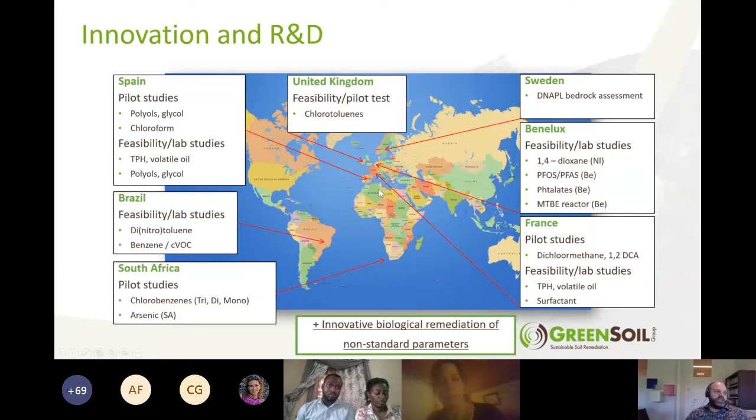Often it starts with questions from clients on either known contaminants of concern, like chlorinated solvents or BTEX, which are quite well known these days, what is possible or not, to very new components. And you can see some of these projects we've been doing throughout the world on different components. And often by the beginning, we also don't know what the outcome is, if it's biodegradable or not, to which extent. But it can be done by a small feasibility study or a larger scale pilot test. And if then it comes out that biodegradation is feasible, we turn it into prospects of a full-scale remediation. And you will see in this slide, a lot of the projects indeed come back as full-scale remediation projects.

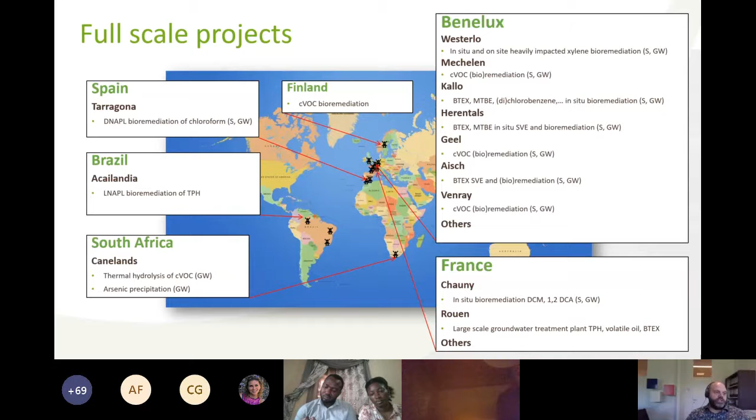And often for us, we try to find solutions where sites have been a long time struggling on finding a solution that could work, that can be implemented, often in very strict chemical conditions. And actually, bioremediation is one of the softest techniques in situ that can be implemented in difficult conditions. So you see that some of these sites then one-on-one come back in a full-scale remediation, which of course is our aim, to provide full-scale remediation options. But that's a bit about GreenSoil in short. Some of you are clients who joined, some don't know us. So I hope that this puts GreenSoil a little bit into a good perspective. But why biology?

Most people know biological treatments from wastewater systems already for decades, and actually that has been implemented already a long time. If you look at a conventional wastewater treatment plant, the first step is most of the time a biological step to remove the bulk of the contamination. Before biology was applied in wastewater treatment systems, that was not the case.

The reason why that has been implemented is because it was very costly to apply chemical or physical treatment techniques to very high flows or very high bulks. So biology in itself becomes more cost effective with higher contaminant mass, with larger volumes, with larger concentration levels. And that's something we often have to point to, because often the reverse is thought of.

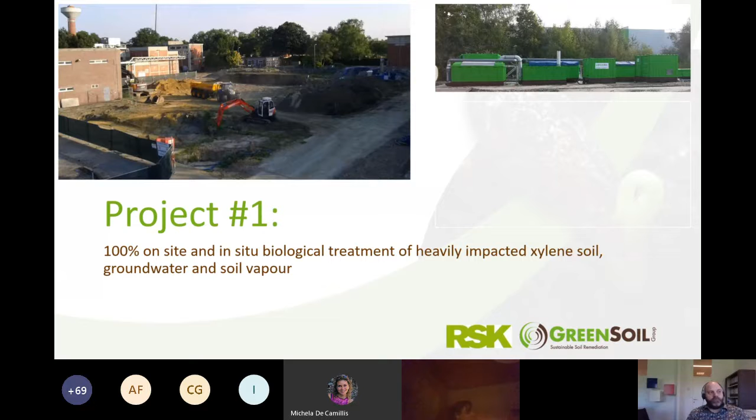It's a Seveso site, a former production site of medical equipment, where xylene was used as a basic component. This project has been conducted in building team construction, so it was a guaranteed outcome project where consultant and contractor have been appointed by the client in one contract.

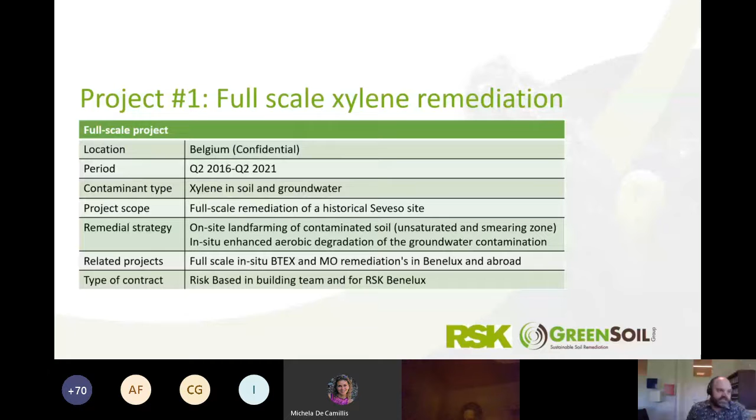The main contractor in this case was RSK, and together with GreenSoil we proposed a total outcome solution, and you will see that even the type of contract can drive innovation to some point, and this site is actually a nice example of that. But to start from, in a nutshell, what's the contaminant situation?

You have the source area, a heavily polluted area. Groundwater fluctuates quite heavily between 1 and 4 meters. So you have LNAPL of xylenes and BTEX that has been smearing out until 3.5 meters of depth in very high concentration levels. In soils, we talk about 10,000s of milligrams per kilogram. So that's very high.

Underneath that smearing zone, there's a highly loaded groundwater concentration plume, up to 10 meters below groundwater level. The difference between these zones is just in soil concentrations. In groundwater, it's saturated; we're talking about 10,000s to 100,000s of micrograms per liter of xylene. But if you go to the lower part from 3.5 to 10 meters, you see that your soil concentrations are in line with the groundwater concentrations.

So there's little sorbed phase in that fraction, but still it contains 7 tons of contaminant mass. But the bulk is the 76 tons in the first 3.5 meters. What we proposed is to treat these two zones actively, because then you have about 98% of the contaminant mass actively treated, and the deeper plume, which has only low concentration levels, will be depleted and degraded by natural attenuation.

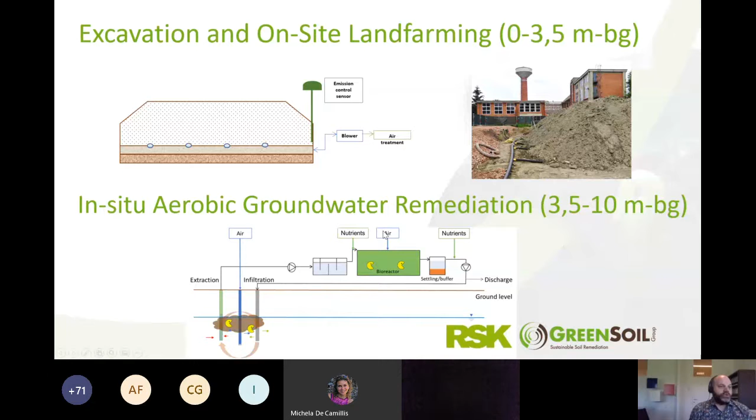This is not an air sparge system because we don't want to blow out the contamination into the unsaturated zone. It's a very homogenized, specific biosparging filter that diffuses the oxygen as homogeneously as possible throughout the whole aquifer. So basically, these are the two concepts we use to treat these two different layers in the soil.

Now, focusing on how we do the on-site land farming and how we built the biopiles, we actually construct the biopiles preferably at the location of the contamination. Why? Because if we can excavate and immediately build up the biopiles, we have limited transport movements at the site, for emissions as well as costs. That's preferable. It also means that the time frame that you have open soils is very, very limited.

And it means that, given that you have a very highly impacted groundwater that you also need to treat, leaching out from these biopiles, which is most often very limited, but if there is some leaching, you can capture that with your in situ biosparging system. If you, of course, build up a biopile in an area that is not impacted, we will put a liner and a cover underneath the liners.

Be aware that we don't put liners on top of the biopiles because that is really not good to get air into your biopiles. So given that it's under pressure, there's no emissions. Once we put the biopiles in place and turn on the system, you don't have any smell at all. After half an hour, it's gone, which is important.

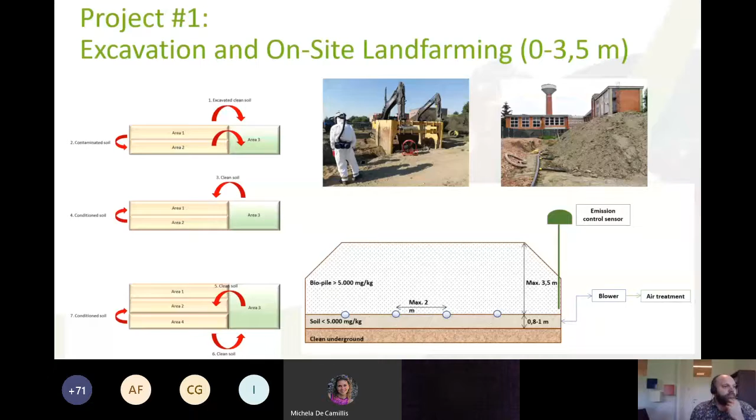Of course, you've seen that the groundwater at this site varies between 1 and 4 meters. It's a highly permeable aquifer. It's a glauconite sand aquifer, which delivers a huge amount of water. Even at these small pieces of land farming that we do, we need to lower groundwater levels so that we can excavate until the bottom of the smearing zone.

We have built a biological water treatment system of about 20 to 25 cubic meters per hour, which allowed us to reduce groundwater levels to 3.5 meters for an area of approximately 10 meters by 30 meters. So even if you would want to excavate this area as a whole, it's impossible because of treatment capacity.

So this water treatment plant is being used both for the treatment of the water extraction during the excavation and biopile buildup, and for the in situ biosparging treatment system. Important to know is also that biopiles cannot be constructed underneath the water table. They need to be built up above the water table, otherwise you cannot aerate them.

So we need to turn around clean soils, put them on the bottom, and treat the heavily polluted soils above the water table in these biopiles. And this graph just shows you also what is capable with

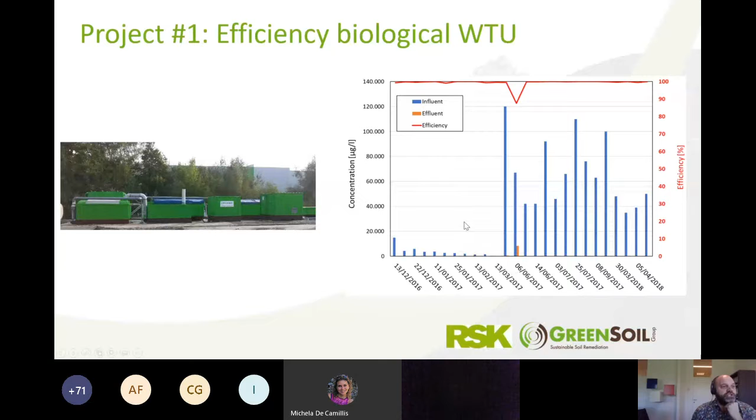Again, we remove the bulk of the contamination in this water biologically, and we polish it with conventional techniques. And then stripping in combination with activated carbon becomes very efficient. So we try to take the best of each technique and combine that in a cost-efficient way.

So let's say we have lowered the groundwater table, we have built up the biopiles. What happens then is that we see that actually these biopiles, if you control all parameters in the right way, you see them increasing in temperature. You see that carbon dioxide is high in your effluent. You see that oxygen is depleted because it's consumed, and you will see that the contaminant front will go from the outer skirts of the biopiles to the inner core.

And at a certain moment, you will see in your extracted air that you treat that the parameters change, and that what has been broken down has mostly been biodegraded. And that moment allows us to say to the consultant or to the RSK in this project, okay, now it's time to take samples. Now we think we're close to the end. We don't need weekly control because we can see from the air that we extract from the biopiles how far we are in the process.

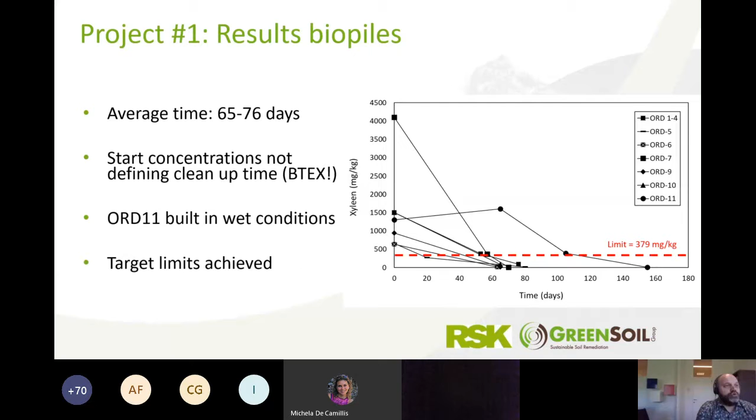And one other aspect that was surprising, and this is why I want to show that also the type of contract defines innovation, is the air that we needed to treat. As I said, we used to do these on-site land farming for TPH soils, and you have very limited volatility. There's only limited load in your air that you extract from the biopiles that you need to treat. So conventionally, you just put a small activated carbon vessel behind it and you're done.

Especially when the biopiles become active, you only get CO2, but in the initial phase, you do get some PIDs, some load in your effluent air. But for this BTEX site, given the very high soil concentration levels and the volatility, we were surprised because we had exhaust gases from our biopiles up to 7,000–8,000 ppm. Of course, if you then use activated carbon, you run dry on your project finances very easily. So after 2 or 3 weeks, we realized, okay, we have really a problem with the amount of activated carbon we need to use.

And then you sit together with the soil expert, with the client, because this is a one contract thing, and you start thinking, what is the best outcome to get out of this problem and to make it manageable? And one of the ideas that our project manager had is, well, we have had this first phase that was less contaminated. We have biopiles that have been treated. Can't we just use them as large compost filters and send air coming from other biopiles right to those, in a reversed way, to those completed biopiles?

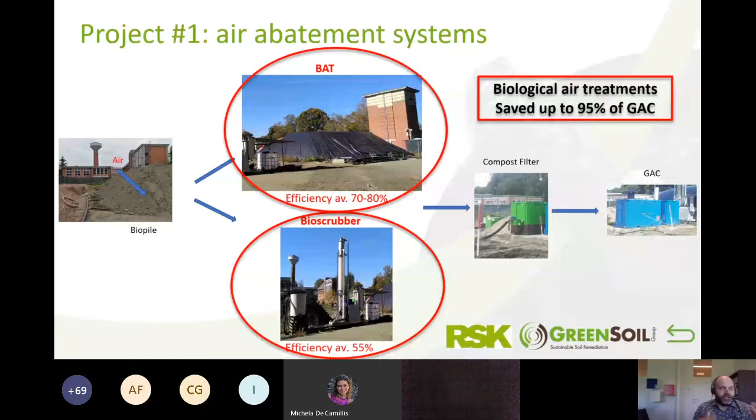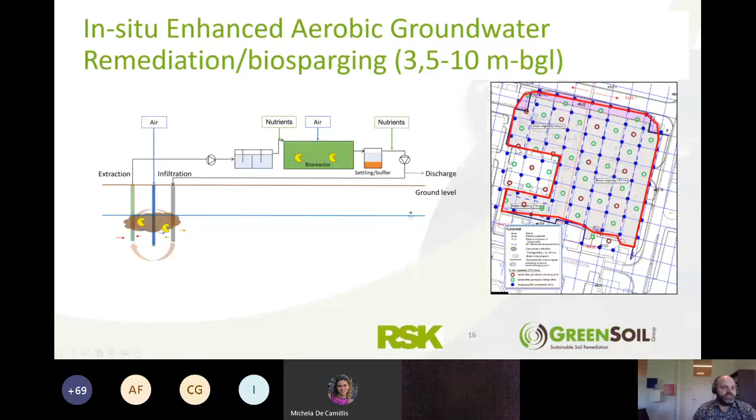Then we go further down for the in-situ biosparging system. That's as explained by recirculation of groundwater and doing a separate biosparging system in between. Now, this is the main area that has been excavated, and it was phased out to do first the biopiling and then the in-situ biosparging system.

But as we started with these works, it was found out that the sewer systems from these active production plants also leaked significantly, and that actually an additional area was found with high concentration levels in soil and groundwater, but that was not suited for excavation. So there we installed also a biosparging in situ system.

The fact that some take longer has to do with the amount of soil contamination, so the amount of absorbed contaminants in the soil. The more absorbed soil contamination, the higher the mass, the longer it takes to deplete certain areas. On the other hand, we were happily surprised with the fact that for most areas, you can also clean this up in 1 year or 1.5 years approximately for remaining areas.

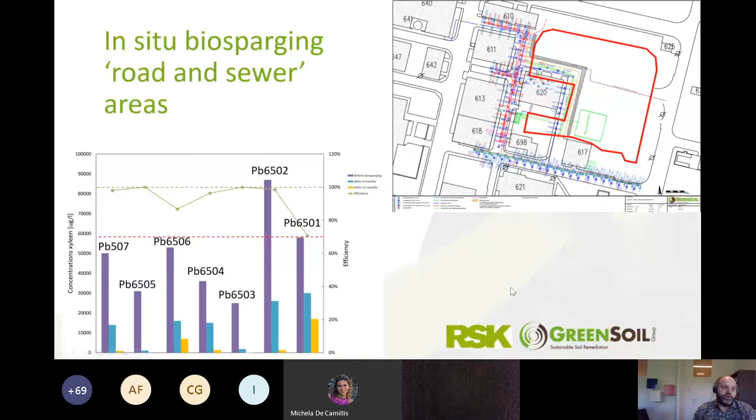So I would say if you can show for these types of contaminants like BTEX that you can clean soils in 2 or 3 months maximum, and in situ in a period of 1 to 1.5 years, 2 years, I would not call bioremediation slow or for limited concentration levels.

So this first project gives you an idea. It is a bit specific because, of course, the site and the type of contamination is very suited for biodegradation. And we cannot always do on-site treatment of all aspects, soil, groundwater, or air, soil vapor. And one of these second project we want to show is that we also combine it with conventional techniques.

In this case, we used an SVE system because groundwater was at 11 meters below ground level, and actually then in the unsaturated zone, it's very difficult to get good bioremediation ongoing because it's not humid enough. The humidity is limited. But what we then try to do is combine that conventional technique with biological above-ground treatment systems.

And so this in situ system is at an active highway gasoline station, where we installed an in situ system composed of 44 SVE filters, 4 pump and treat wells, and a biological water treatment system. And we proposed to the client to use an automated compost filter and a GAC, because there were approximately 12 tons of contaminant mass present in this unsaturated zone.

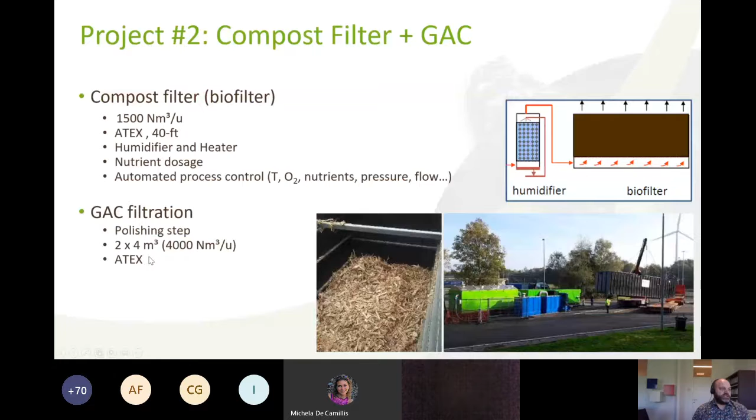We were at ATEX level, at 100 plus LEL working, so we needed to have specific extraction units, and it had an ATEX blower of 1500 normal cubic meters per hour. The GAC filtration is a polishing step, and it's 2 container units of 4000 normal cubic meters per hour.

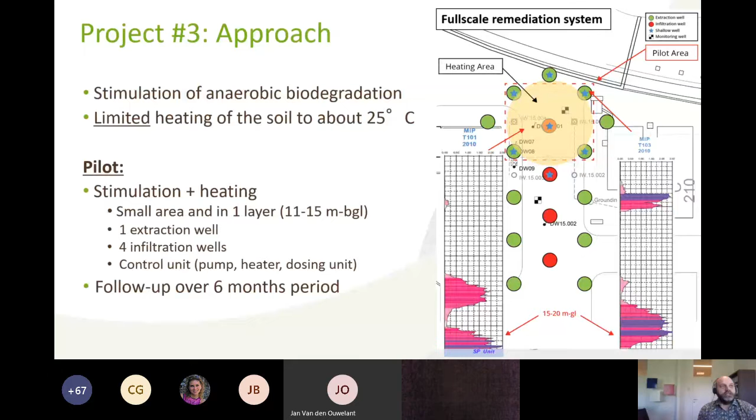And if you can keep these conditions of high degradation for a longer time, you see that you gradually deplete the chemicals out of your soils. And why do we do the heating? Because heating accelerates not only biology, but also this bioavailability, this mobilization. Heating up things makes them more smooth. It's like jam. If you heat it up, it becomes less sticky. That's also what heating does. So given the difficult geology, we also did this thing with the heating.

There was one surprise. The heating process did work out, but due to some technical issues with the groundwater extraction, very fine sand impacted our pumping. We were in the beginning limited in the flow we could recirculate, so the heating of the extracted groundwater and the reinfiltration of that heated water was limited, so we only saw in the first 2 or 3 months a limited increase in temperature, which we could enhance significantly when we changed over to another pump regime, another way of pumping that was less impacted by the fines.

And actually, as we did that, we could increase the groundwater up to 26 degrees, close to the injection well. So we did create an area with increased heating. But the thing was that it was too late. And why? Because all contamination was already degraded within 3 months.

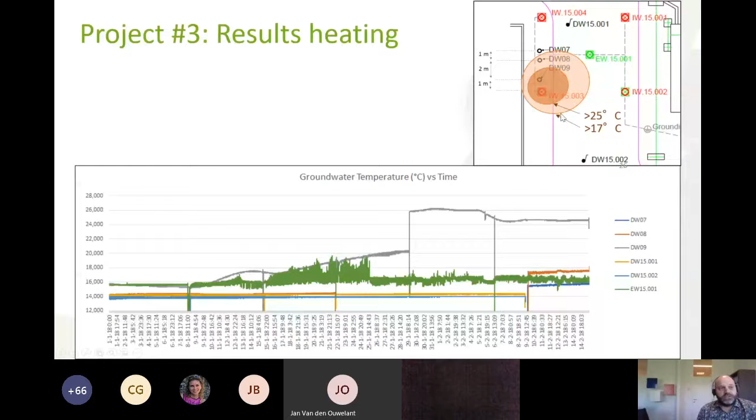And that's actually what we see here. If you look at the different monitoring wells and the injection wells, the pilot test is set up with 1 central extraction well and 4 injection wells in a square, so we have follow-ups at different distances of the evolution of the concentration levels. In this case, we started, for example, in the closest monitoring well, with concentration levels of dichloromethane up to 200,000 micrograms per liter, and of 1,2-DCA of about 160,000 micrograms per liter. And we also monitor the end product of the degradation, being ethene.

And you see that from approximately June until the end of the summer, August, we had an exponential decrease. Again, biology can go very fast as long as the contaminants are bioavailable, which in this case was the case. We see that the further you go away, deep well 7 is in between 2 injection wells. This is where at the latest point you will see a result. You see that the shift is delayed a bit.

It's going just after summer, which is normal, because if you want to flush this whole system, you need to have the time to extract and reinfiltrate, so that it's a closed cell. And that's what you can see at this moment at deep well 7. You can see that it's a closed well. A similar thing happened at deep well 15.001, which also showed a later change.

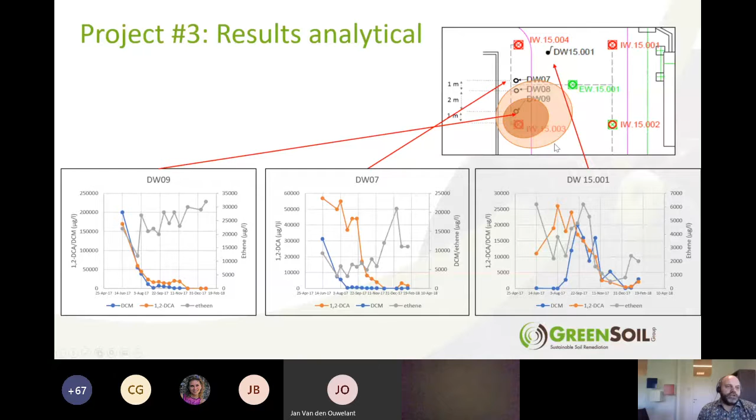But if we see in our extraction well also this decrease, this depletion, then we know that the whole area has been cleaned up. And if you then expand that to a full-scale application by monitoring the different areas, the different extraction wells, you can fairly well predict how far along you are in a certain area with your remediation.

This is a slide I'm not going to discuss because I would like to refer to the next seminar of our R&D manager, John Deck, who's a microbiologist and knows much more about it. But we also always monitor molecular analysis and the evolution from a molecular biology standpoint. The only thing we can say about this is that indeed the ones who can degrade the 1,2-DCA and dichloromethane increased significantly throughout the pilot test.

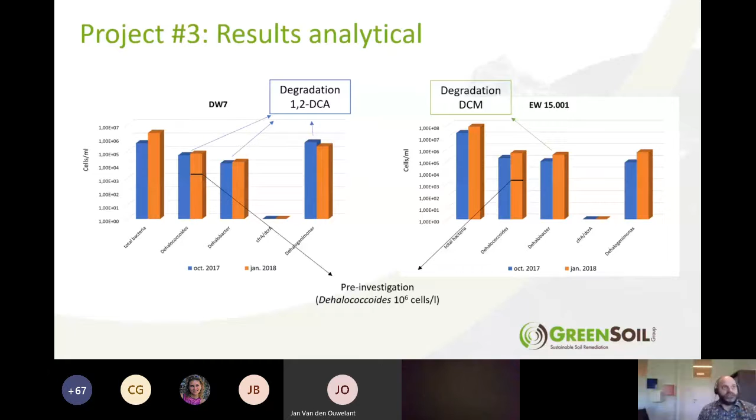We also need to state that prior to the start of the remediation, natural degradation was already at relatively high levels. So this was a site where degradation was already pretty ongoing, but it was just not enough. The nutrients were lacking to complete it. And then you can see that if you add them, and you add them properly with the right nutrient source, then it can jump on.

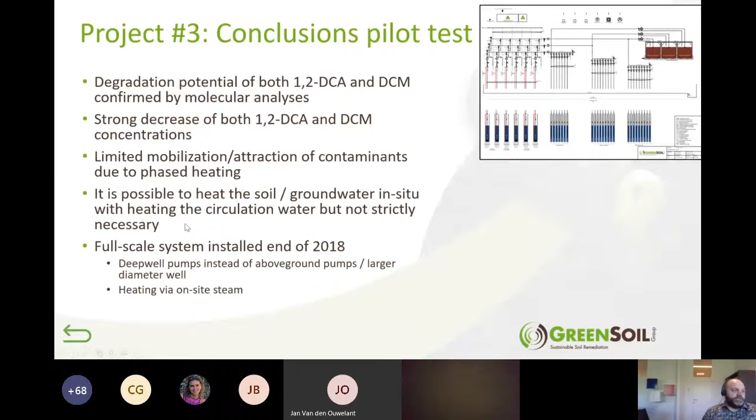The main conclusions for the pilot test, and it's a bit short notice, all of it, are that basically the biology did very well, but we had some problems with limited mobilization of the phased heating, and we had some additional engineering things we needed to include in the full-scale system, which now is operational from 2018. It's without heating because it has proven not to be strictly necessary, and then you don't have to make that cost. We have calculated theoretical consumption of Dehalo-GS for the full scale.

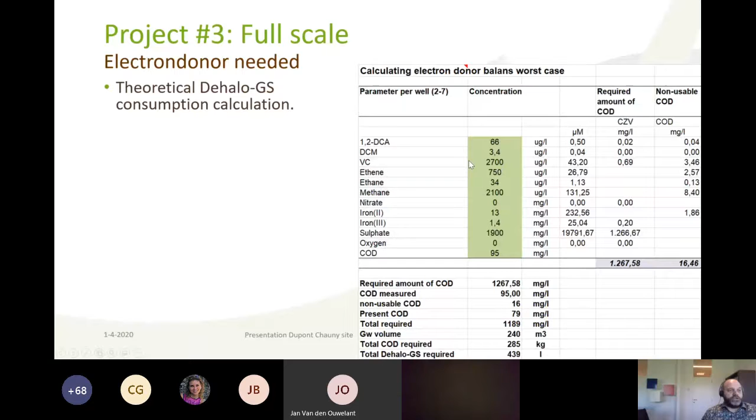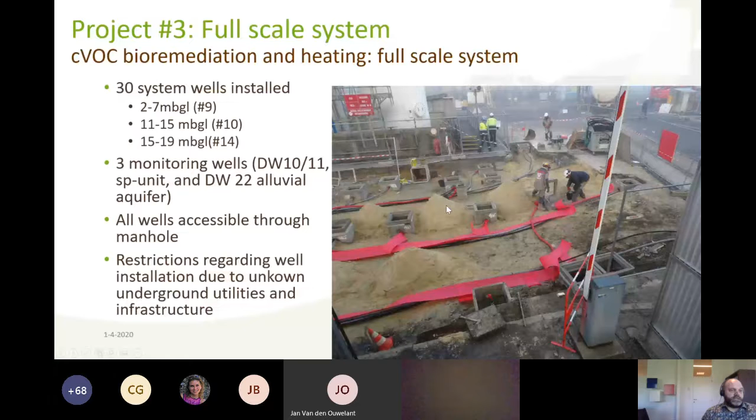We have been applying a factor 10 more because you always have losses, and it has been implemented in quite restricted conditions, but it's basically quite manageable and under control. So this is now running for a couple of months, and also on the full scale in the 3 geological layers, we're seeing the same things happening as in the pilot test, where you only need a recirculation system and nutrients and knowledge of the aquifer and how to combine them to get to a good outcome of bioremediation.

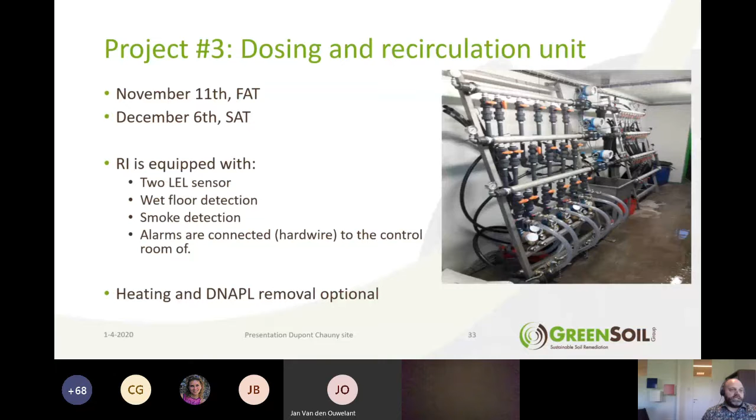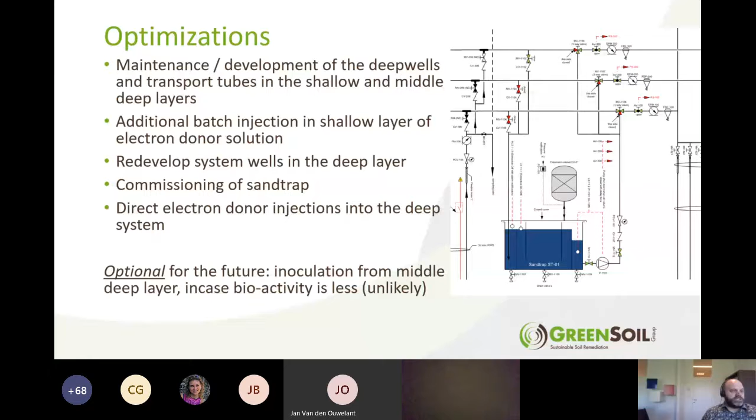Of course, heating and DNAPL removal, which we can also do as a separate technique, has been involved in these treatment units, because often it is a combination of different techniques that we need to apply to get to the end result. But in this case, so far, it has not been shown to be necessary. So these are some more slides on the O&M, but it's less of interest at this stage. It's more engineering-wise.